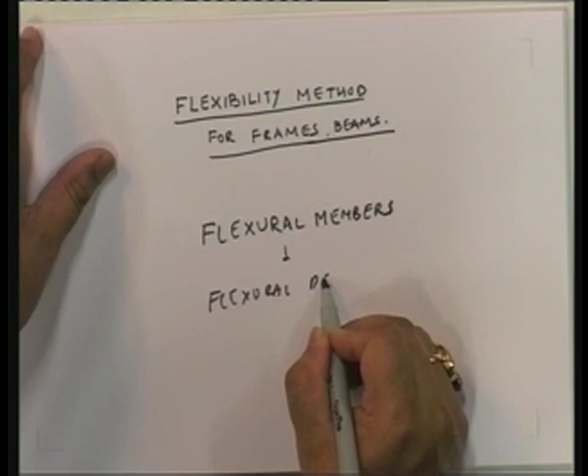Okay, so today we are going to be looking at the flexibility method for beams and frames. The essential difference between what we did for trusses last time and what we are doing for beams and frames is that these are flexural members as opposed to axial members—in other words, flexural deformations.

Now, just like we saw that in a truss you started off by looking at the truss structure and then the member forces in terms of the external loads, and from there moved on to solving the structural problem—now let us look at a member which has flexural deformations. What are the member end deformations?

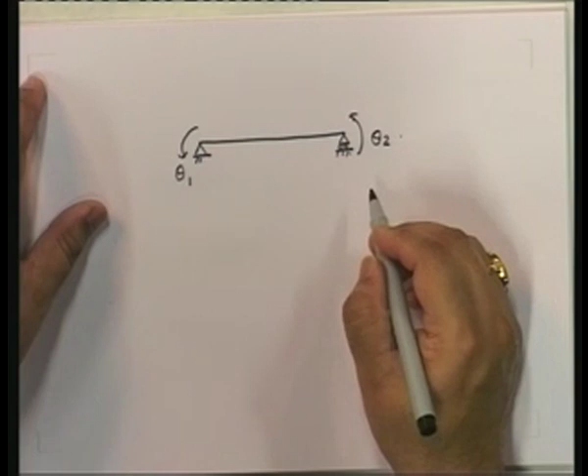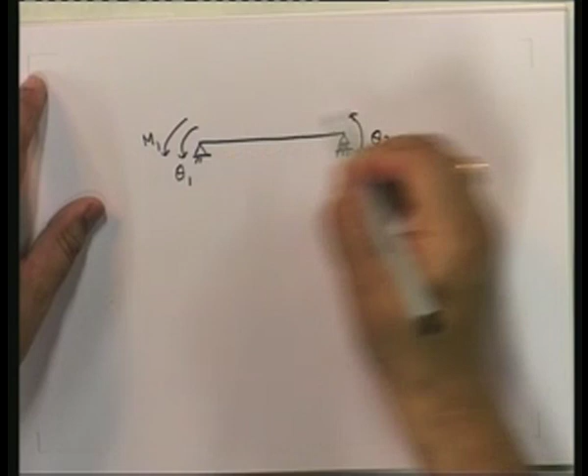We've already done this, I don't want to go into this. It is going to be theta 1 and theta 2. Corresponding to these thetas are essentially moments m1 and m2. Now, in addition to this, there may be thetas due to loads on the member. So if we write this down, we've already written this down—I am just explicitly writing it down.

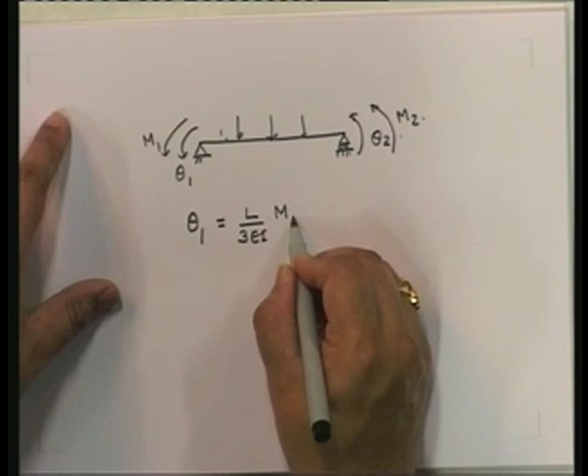Theta 1 is equal to L upon 3EI—I am going back to the old form and just rewriting it—plus theta 1 0. What is theta 1 0 due to? Understand that theta 1, the rotation here, would be related to m1, m2, as well as theta 1 0, which is the rotation at the left end due to the member loads.

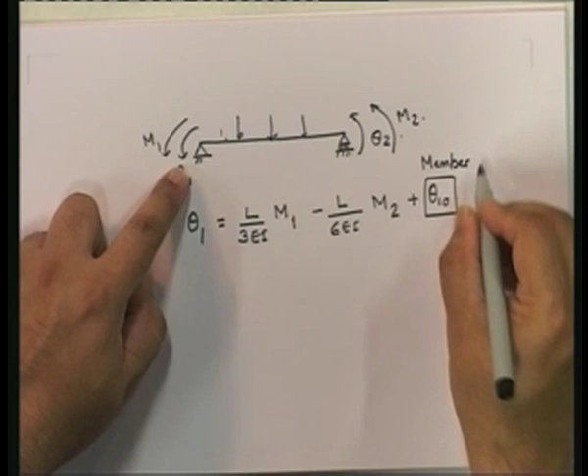So this aspect is due to member loads. Similarly, theta 2 is equal to minus... both of these are due to member loads. If there are no member loads, then these two are zero. So this we have already seen.

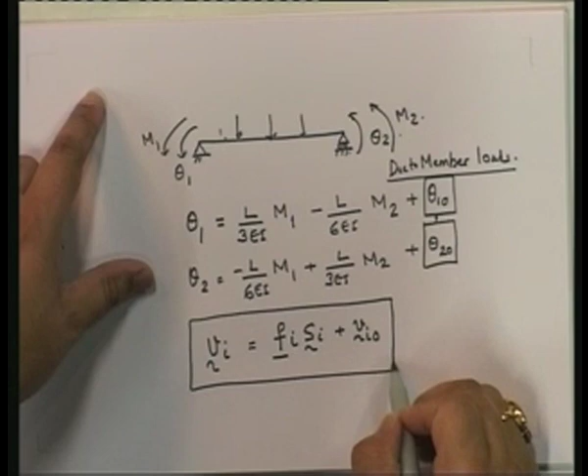So now I am going to rewrite it in this format. Now let us see what these terms are. If you look at them, Vi is equal to theta 1 and theta 2. In other words, the member deformations are the rotations at the two ends.

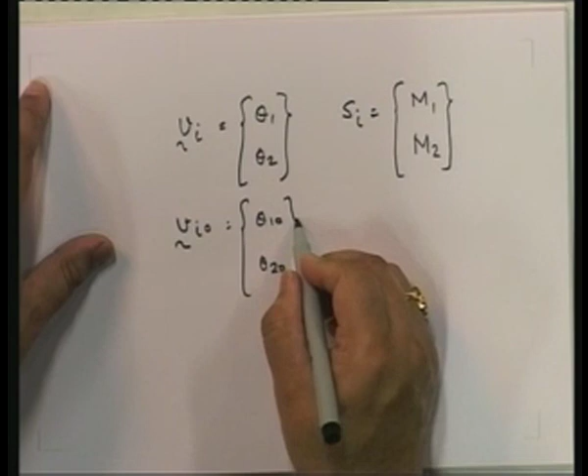This is the member deformations—I am using the same notation that we are going to be consistently using in this approach. Then what is Si? Si is equal to M1, M2. What is Vi0? It is theta 1,0 and theta 2,0.

Vi0 is due to, and I will call it in a broader sense, member effects, because we've already seen that rotations can happen not just because of member loads—they can also happen due to temperature, etc. We've already discussed that, so I won't go into the details. Finally, what is Fi? Fi, if you look at it, is L upon 3EI, minus L upon 6EI, minus L upon 6EI, L upon 3EI.

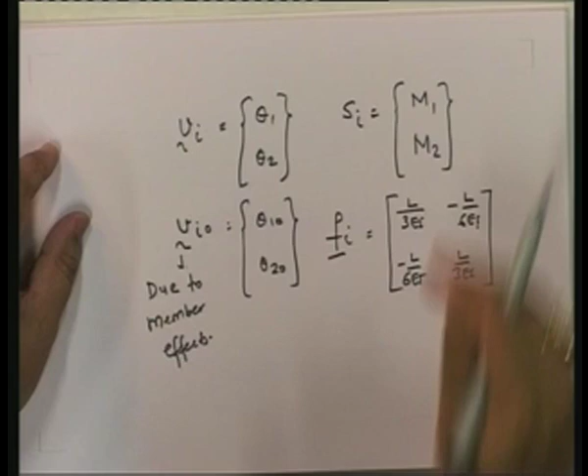So in other words, if these are defined in this fashion, then this is valid, because we know this is valid from earlier. So this is what we are going to be going with.

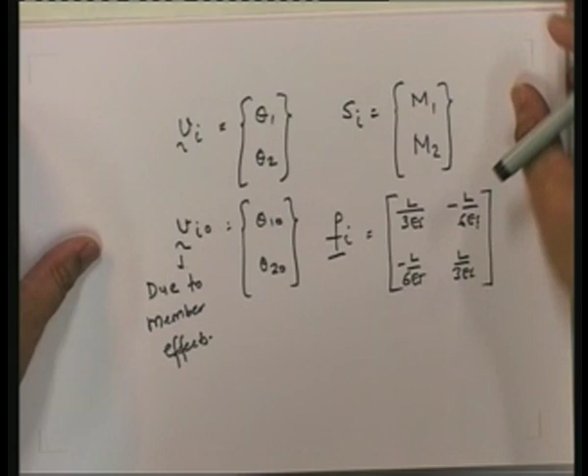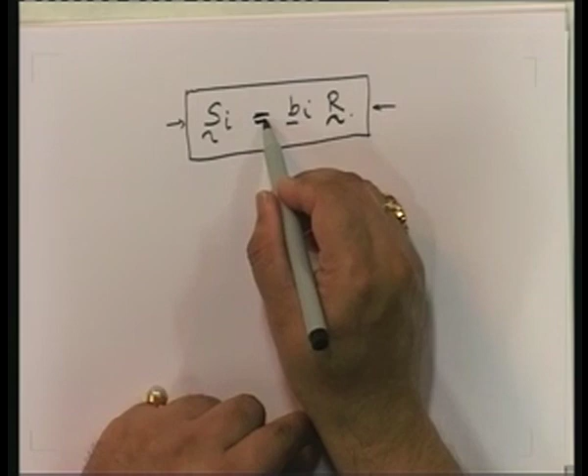This is one relationship. The other relationship is—what is this relationship? If you look at this again, all it says is how we get the member end moments corresponding to the loads applied at joints. Remember that loads applied on members are already considered in the effect we considered in Vi0—so this is just member end loads.

So if you really substitute it in here, we will see that ultimately we get displacements, in exactly the same way. I'm not going to go into the details, but once everything is set up, you will see that this is equal to the same terms, the way I wrote them.

This thing is valid because once you substitute the value of Si into Vi and all those things, you will see there is one term, and then there is one additional term, Bi transpose Vi0. This is a very important term.

These are member end rotations due to the loads applied on the members themselves, and by using virtual displacement, you will see that R can be related in this form.

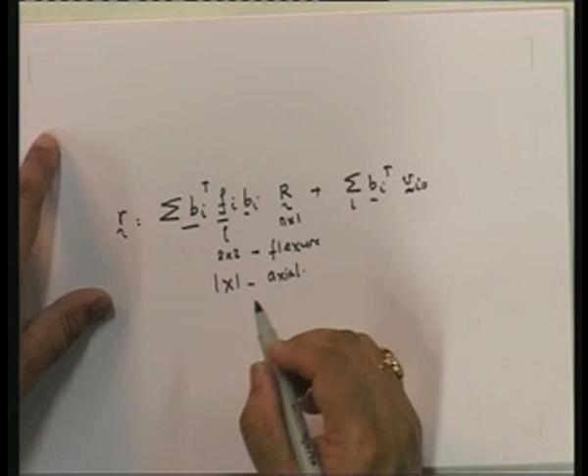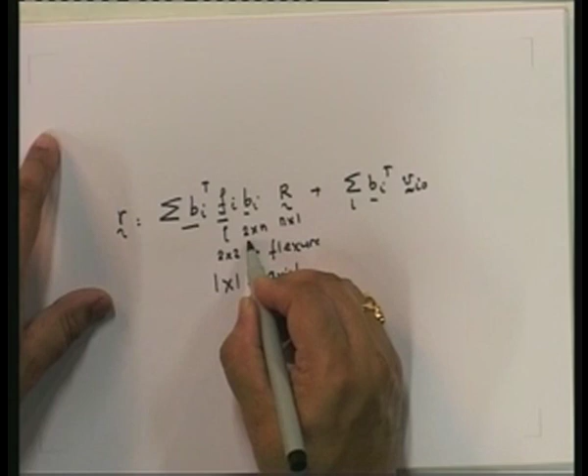This is for a flexural member, it's 2 by 2. For flexure, it's 1 by 1 for axial. If this is n by 1, then by definition this is going to be 2 by n or 1 by n, depending on whether it's a flexural member where you find the member end moments, or an axial member where you find the axial force. This correspondingly is going to be either n by 2 or n by 1, and this is going to equal a 2 by 1 or a 1 by 1.

Now I have this question. I did not introduce this in the truss, but I am introducing it here. What is this effect? For a flexural member, we know what this is - it's due to member effects, such as member loads, temperature, etc. In a truss, where would this come from? This would again come from member effects, which may be temperature, elongation or contraction due to temperature change, or lack of fit.

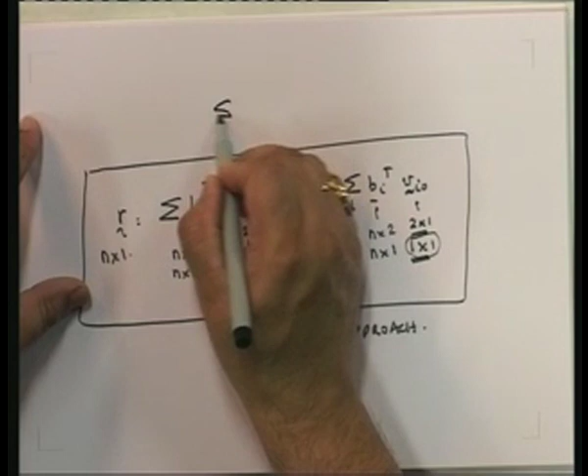Remember that, so this is member effect, and this one again is either n by 2 or n by 1, and ultimately this is n by 1. So this in essence defines the flexibility approach for structural analysis. How do we find out the member forces? Member forces in terms of the external loads are given by this.

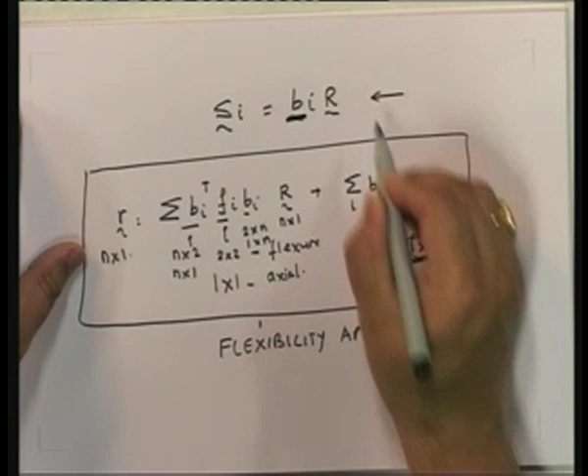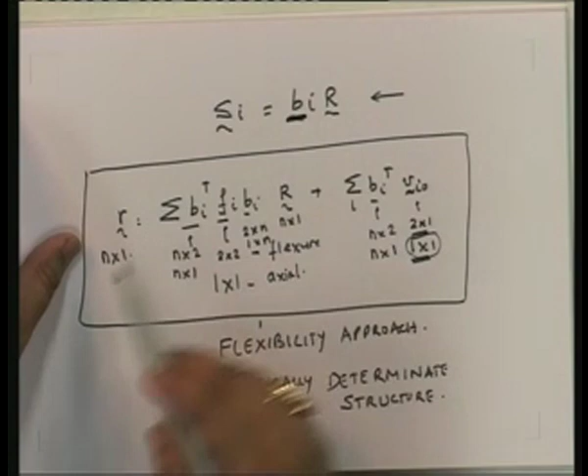So these are the member forces. Remember that all of this is for a statically determinate structure. So this in essence defines the member forces related to the structure loads, and these are the structure displacements corresponding to the loads. That in a sense is the definition of structural analysis: find the member forces and find the deflections. Now this again is for a statically determinate structure.

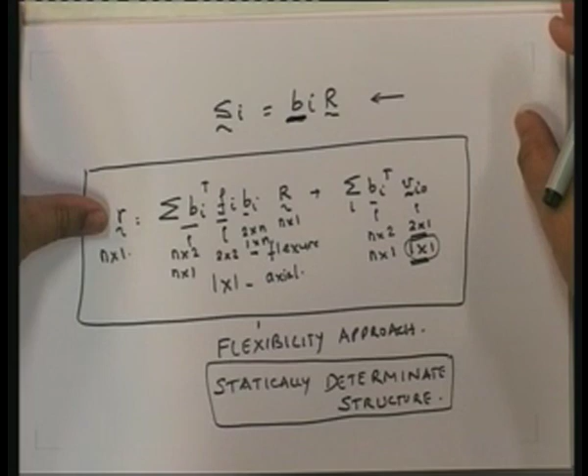Now let us see, once we have this, how we can apply it to a member. For a beam, it doesn't make much sense, so I'm going to take a frame problem instead and see how we deal with this. Of course, the frame has to be statically determinate.

Again, I am not going to go through the entire problem, I am just going to list out how to get what we want. So now let us look at it and put some loads on this structure. Let me put some numbers here - this is EI, this is EI, this is EI. Let us say that this is 5 meters.

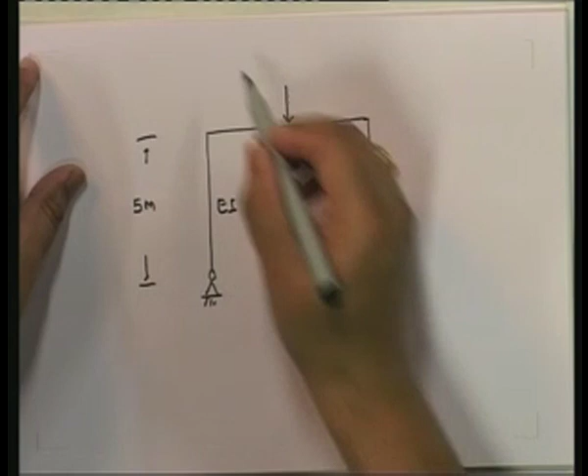This is 5 meters, so is this 5 meters - all of them are 5 meters. This load is let's say 40 kilonewton. And here, what we want to find out - there are lots of things to find out, but let me just tell you, I want to find the member end moments, because once I know the member end moments I can draw the bending moment diagram.

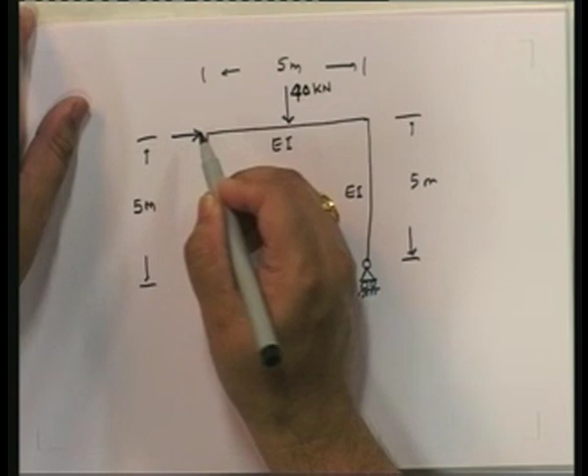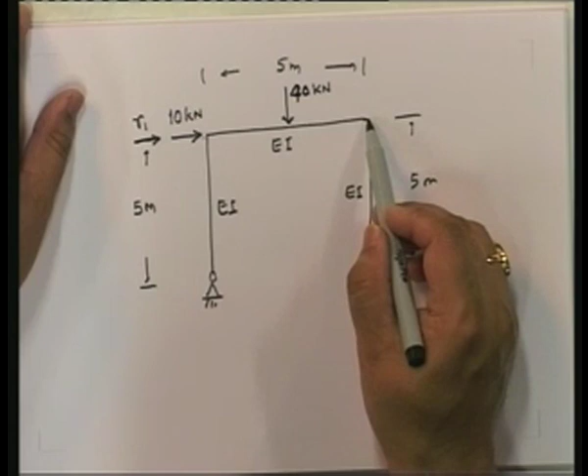So I want to find the member end moments, and in this particular case I want to find how much - well, let me put some other number here. Let me put 10 kilonewton here, and I want to find the displacement of this joint. In other words, the lateral displacement - note that since all members are rigid, the horizontal displacement of this will also give me the horizontal displacement of this. In addition, let me find out how much this goes by.

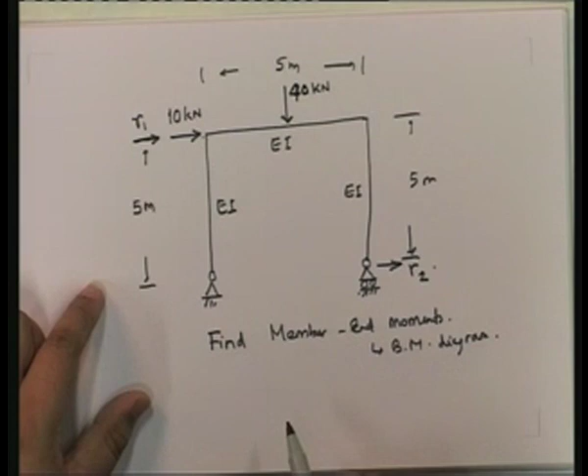Okay, so these are my two questions: how much does the top displace by, and how much does this displace? This is my overall statement. I also want to find member end moments. Once we find out member end moments, you can actually draw the bending moment diagram. And what else? R1 and R2, the values of R1 and R2. So this is my problem statement.

Now I have to understand how I am going to go about this. Look at this and you will see that this is essentially a statically determinate structure. So let us see how we are going to go about it. Now the first step in this problem, what do we find out?

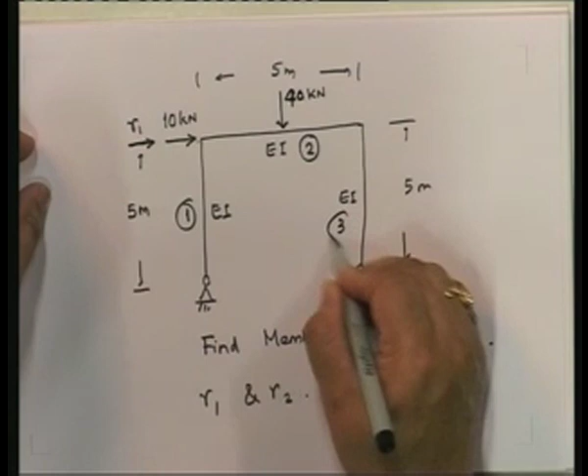For each member, we find out its member end displacement. Let me qualify this: I'll call this member 1, this member 2, and this member 3 - A, B, C, D. So AB is member 1, BC is member 2, and CD is member 3. So now the first step is for each one to write down the member force deformation relationship.

So for AB, okay, for AB, what is the this thing? There is no load, okay, and therefore V1, which are the two rotations at the two ends, are equal to - I'm going to write this in this format - L upon 6EI, and L in this particular case is 5, and note.

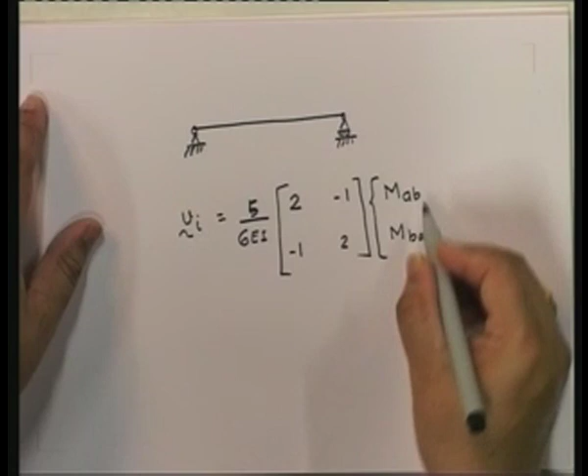See, 2L into upon 6EI is L upon 3EI, which is what you have, multiplied by the moments, which are MAB and MBA. Since there is no member load, so for AB, which is member 1, for V1, this is it.

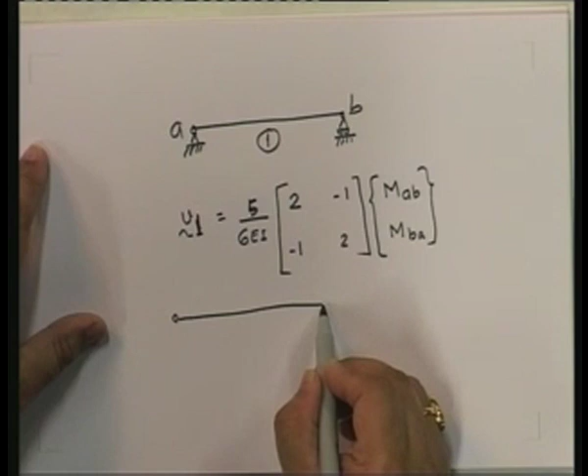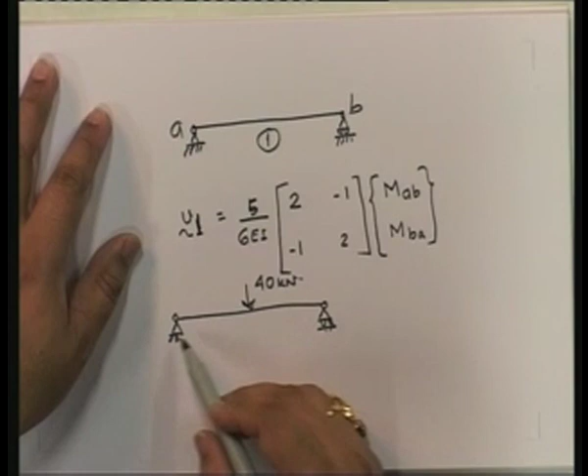Now, for member 2, this has a load of 40 kilonewton acting here. So the first thing that we have to do is understand that V2, the first part is this, but there is an additional Vi0, V20 that we have to write down. And that V20, how do we find out? Well, we find out under this, it's going to deflect like this, and we need to find out this and this. How do we find that out?

Under this, I think we have done it enough, so I'm just going to write it down how to find it out. This is going to be this is M, this is M1 and M2, this is M2, and once we go through the entire process, we see that theta 1,0 is going to be equal to, in this case,

50 into 5 by 4. By the way, minus, because these are opposite to each other. So 50 into 5 by 4 is this part. For that, it's going to be equal to 2 by 3. And then you'll have minus 50 into 5 by 4 into 1 by 3. And so essentially theta 10 is equal to minus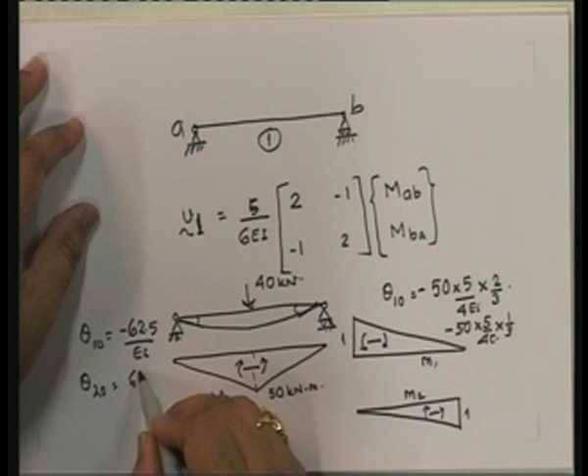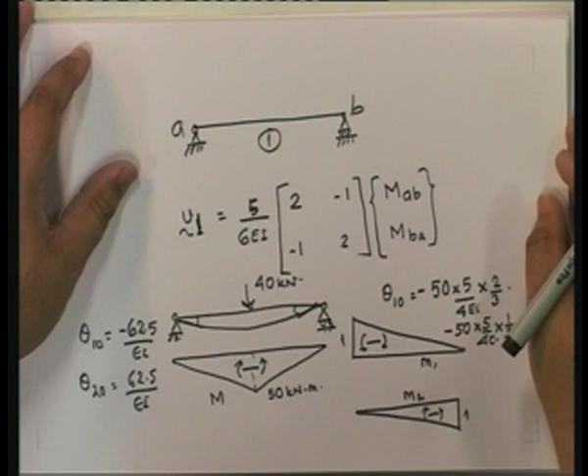62.5 by EI. Okay, and theta 20 is equal to 62.5 EI. Okay, that is actually, if you look at it, it'll work out to PL squared upon 16EI. Okay, but doesn't matter, we've computed this.

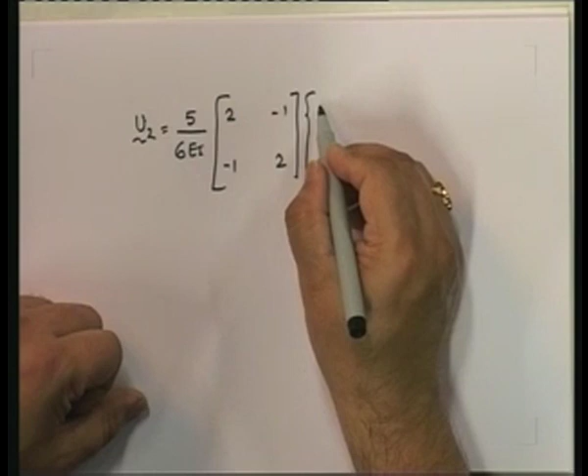Okay, so for V2 is going to be equal to 5 upon 6EI, 2 minus 1, minus 1, 2, MBC, MCB, plus 62.5 upon EI, minus 1 plus 1. And V3, since there is no load on it, is going to be equal to

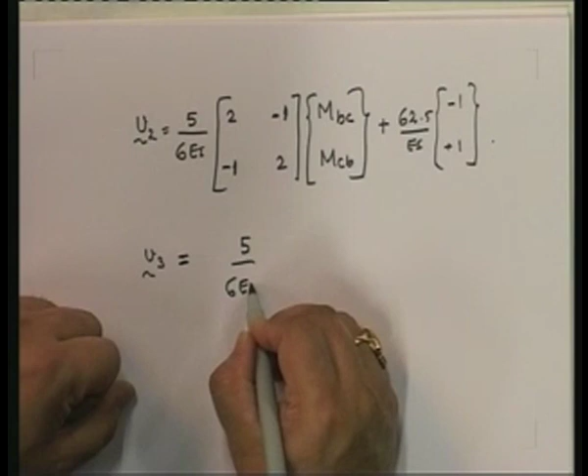V3 is going to be equal to 5 upon 6EI, 2 minus 1, 2, MCD, MDC. Okay, so these are, we have written down the force or deformation force relationship for each member. This part is the F into SI, and this part is the VI0. For V1 and for 1 and 3 there is no VI0. For 2 there is a VI0 which we have computed.

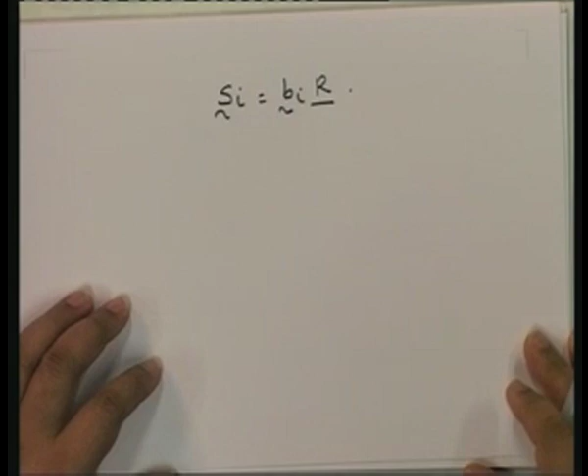Okay, so now the question comes, next what? Next is evaluating Si equal to Bi R. This is very, very important. Okay, so how do we find out this Si equal to Bi R?

What is R? In this particular case, R is, since we have - what are we finding out? We are finding out small r is equal to R1 and R2. Those are the displacement at the top and at the hinge. If you look at this, therefore capital R will be R1 and R2 corresponding to the forces. So if you look at this particular concept, that means in this particular case, what is R equal to? It is irrelevant what we are getting. R, you will see, will be equal to 10 and 0.

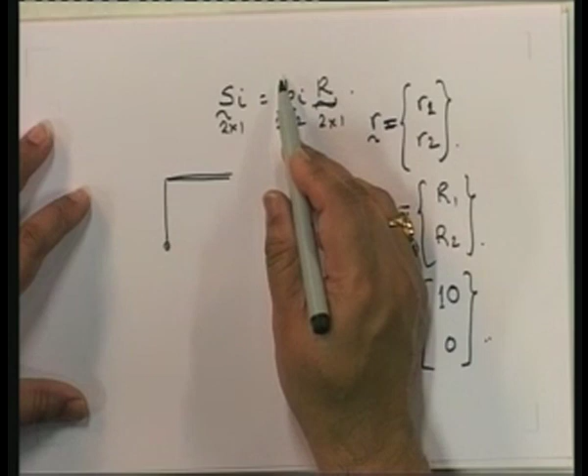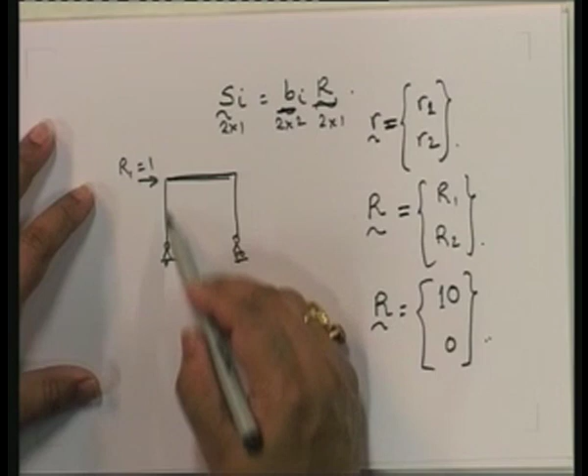In this particular case, so how do we find out Bi? What we do actually is this: we found out, so this is 2 by 1 and this is 2 by 1, this perforce has to be 2 by 2. Now this 2 by 2 has two columns. For each column, the way we find out the column vector is this: put R1 equal to 1 and find out the member end moments.

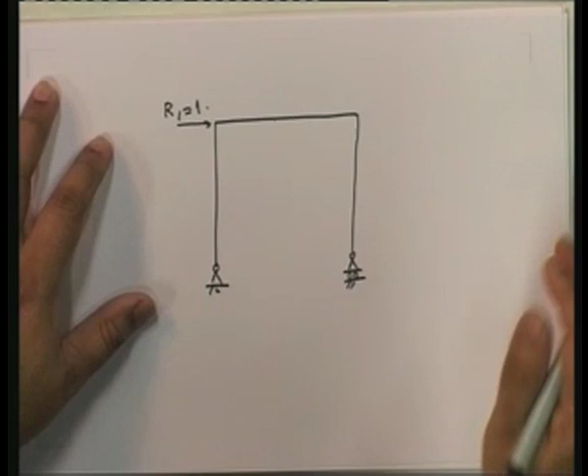Put R1 equal to 1 and find out the member end moments. If we look at that, this becomes... so this is 1. If you look at this, you will see that this gives rise to 1. So the reactions: sigma fx equal to 0, sigma m equal to 0, take moments about this point, and sigma fy equal to 0 gives me all of these. Once I have all of these, my member end moments become this.

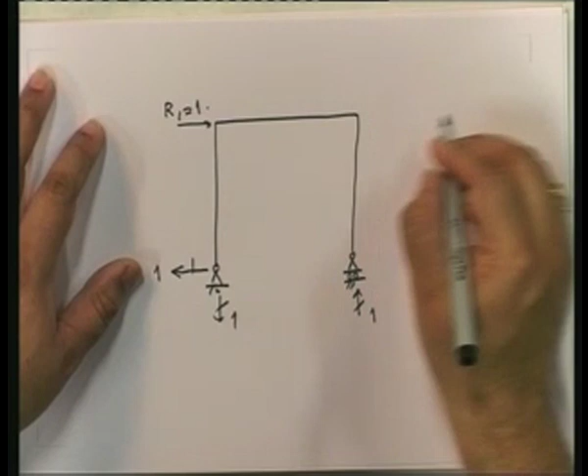So how do I find out the first column of B1? I am finding out the first column for B1. What would that be? Let's look at it. A. So I am finding out... if I look at this, I can draw the bending moment diagram.

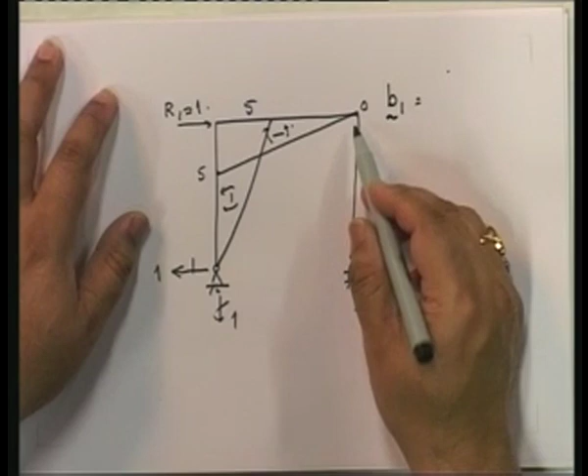How would the bending moment diagram look? It will look like this. This would be 5. Here, this would be going in this fashion. And over on BC, it's going to be like this, 5 and 0 here. And over here it has to be 0 because this one doesn't take any moment.

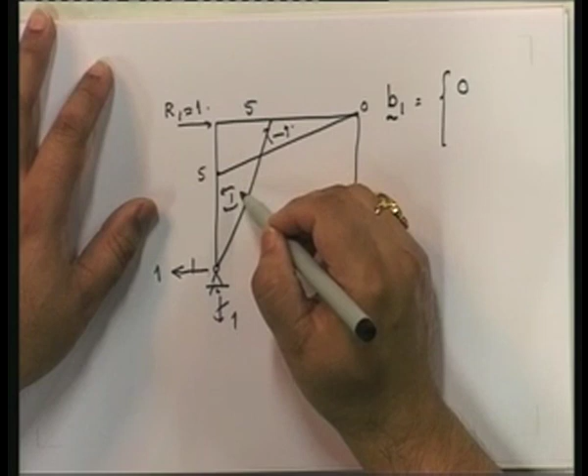So if we look at it, B1: at this MAB, what is the moment? 0. So this is 0. At this point, what is the moment? Anticlockwise 5. So anticlockwise 5 is plus 5.

Let's find out B2: 0. It's clockwise at this end, it's clockwise 5, so this is minus 5. Here it's 0, so it's going to be 0. What about B3? B3 you will see is equal to 0, 0 because there is no moment at this end. So this is the first part for R1 equal to 1.

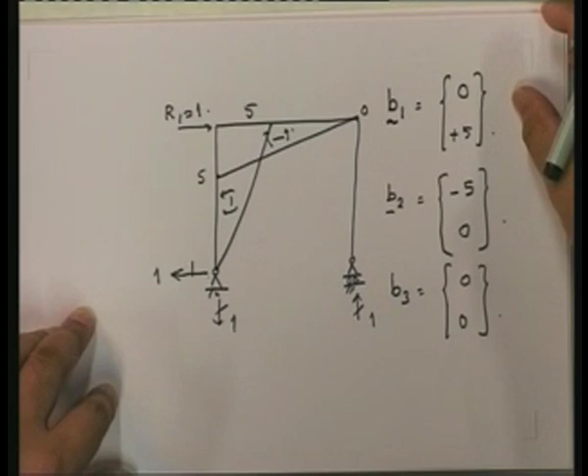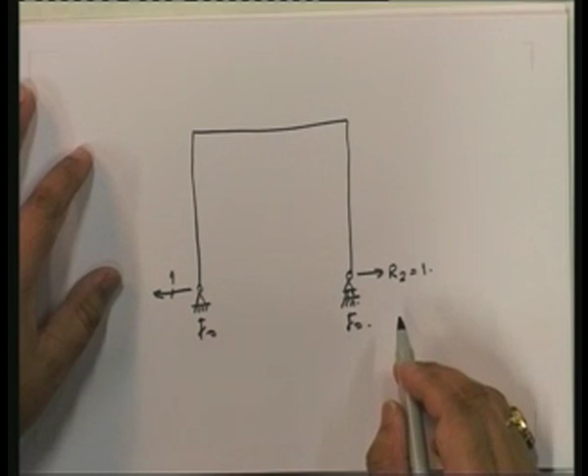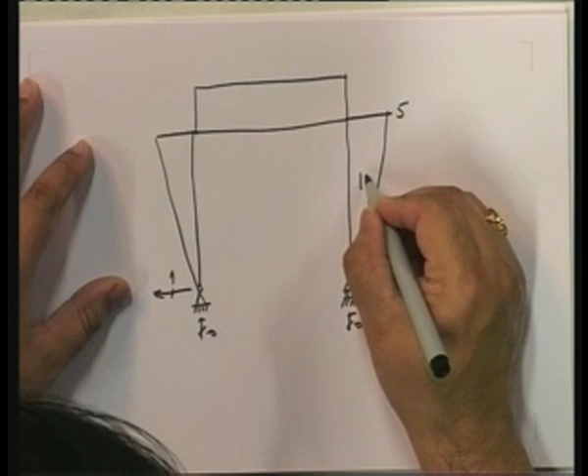Then we are going to put R2 equal to 1. If you look at this, this will give rise to this, and these two are going to be equal to 0. So how will the... 5, 5, 5. This is the bending moment diagram.

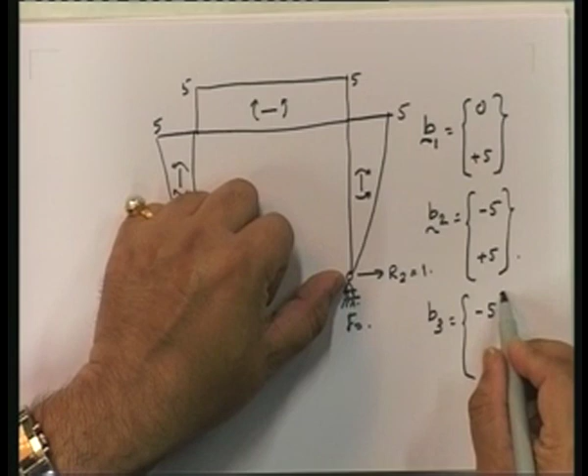Therefore if you look at B1 due to R2 equal to 1, this is going to be equal to 0, and this is again anti-clockwise, so it's going to be plus 5. B2 is going to be: this is clockwise, so it's minus 5. Here it is anti-clockwise, so it's plus 5. B3: here it is clockwise, so it's minus 5. Here it is 0.

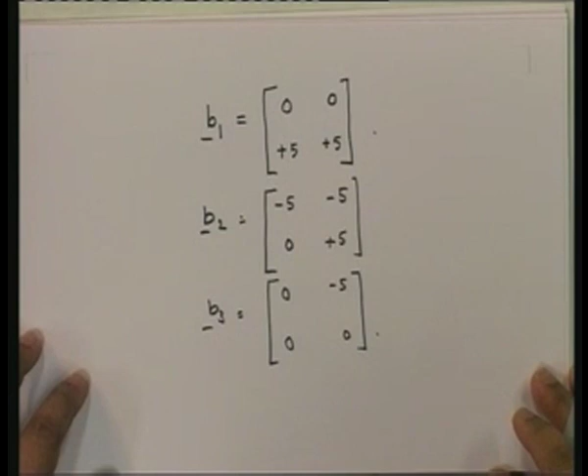So ultimately, having done these, if we write down B1, this is going to be equal to 0 plus 5 plus 5. This is coming from R1 equal to 1, and this next one is coming from R2 equal to 1. Similarly, R1 equal to 1, R2 equal to 1, each column, B3, R1 equal to 1 and R2 equal to 0.

Now here, what are the things for B1? This one, S1, is written in this way: MBC, MCB, and this is equal to MCD, MDC. This is S1, this is S2, and this is S3.

So now, if I have got these, I can plug in. What is my R? I know I have already given my R. R is equal to plus 10, 0. So I can find out my S1 very easily. That's the first step: find out the member end moments. And if you look at the member end moments, you will see that they are equal to...

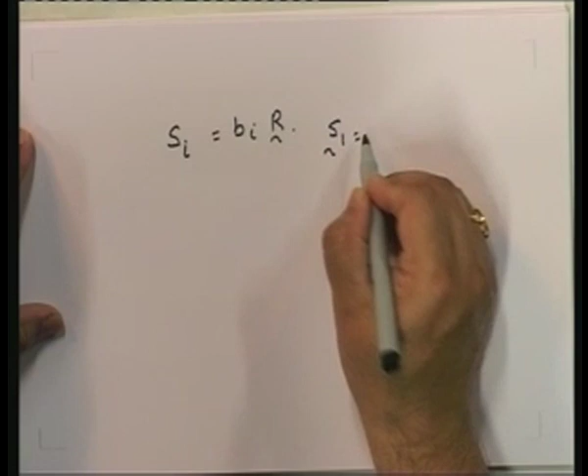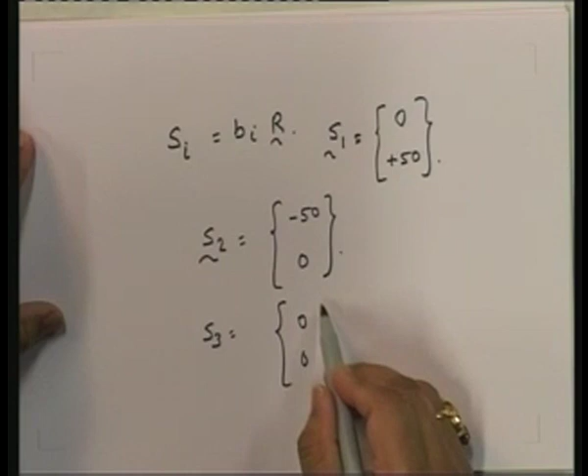If you put in, you will get S1 equal to 0 plus 50, S2 is equal to minus 50 and 0, S3 is equal to 0, 0. Satisfy yourself that this is indeed the case for this particular problem.

Now, we will come to problems later where we will see that this is not a complete picture of my S1. In fact, S1 actually has some additional terms that we will look at later. Right now I am not too concerned with this. For this particular problem, you will see that this is indeed how my S1, S2 are.

Now, once I know my B1, B2, B3, and I have also got this, what is my R going to be equal to? I am going to just put it down. My R is going to be equal to, if I just put it down, you can actually do the matrix multiplication later.

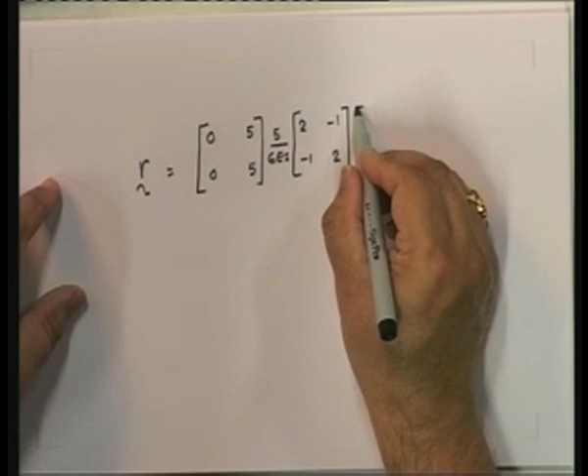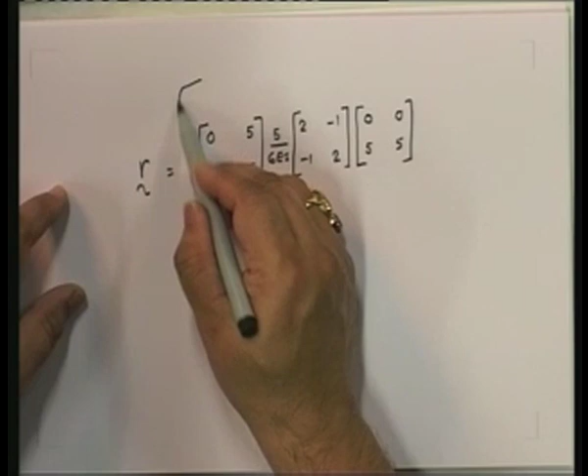This is B1 transpose, then into 5 upon 6 EI, 2 minus 1, 2, and then B1, which is 0, 5, 0, 5, plus minus 5, 0, minus 5 plus 5, 5 upon 6 EI, 2 minus 1, 2, minus 5, 0, minus 5 plus 5, plus 0, 0, minus 5, 0, 5 upon 6 EI, 2 minus 1, 2, sorry, this would be 0, 0, minus 5, 0, 0 minus 5, 0.

If you do all these computations, you will get your displacements R1 and R2. So you've got your S1 and S2, you've got your R, and that in a sense is, what are these terms?

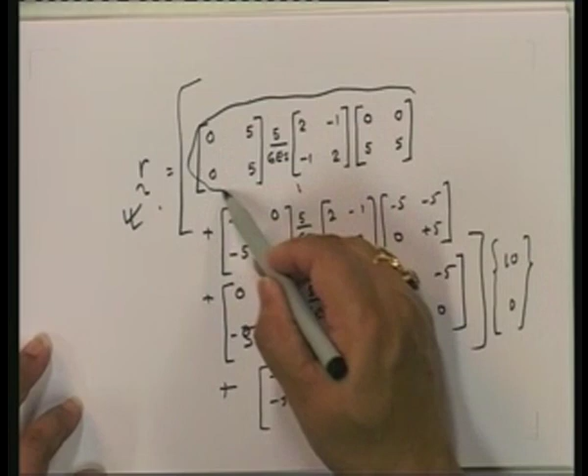This term is the contribution to the flexibility matrix of member 1. This is F2, this is F3. So if I add F1, F2, F3, that gives me the complete flexibility matrix multiplied by 10 into 0. So this gives me the structure flexibility matrix for this particular structure.

You will also notice something else, that in a structure flexibility matrix, remember the member flexibility matrix was 2 minus 1 minus 1 2 into L upon 6 EI. Did you notice something? It was symmetric. When you do these computations, you will see that the structure flexibility matrix is also symmetric. What does that mean? That Fij is equal to Fji.

Now, what is this flexibility? If you look at it, what is F11? You will get in this, you will get F11, F12, F21, F22. Each one you can evaluate. What do these mean? Let's look at this.

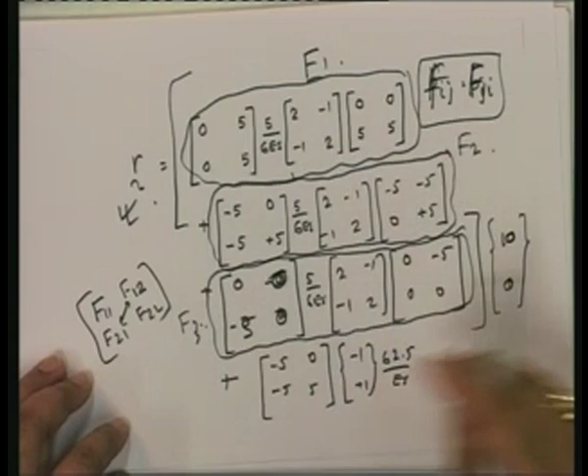A symmetric matrix is one in which the transpose is equal to itself. That is what a symmetric matrix is. This additional term essentially comes from the effect of the local load. So we've considered the load effect of the structural loads and the effects of the member loads. And obviously this is going to be a superposition of the two. This in a sense is structural analysis the way it is.

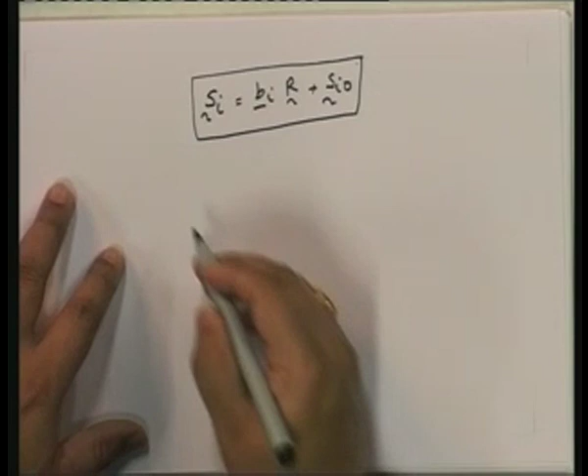Now remember I said that SI is equal to BIR in this particular case. When do we need to consider some additional terms? We will see that SI will not only be just BIR, there will also be an SI0. Where does this SI0 come from? So in other words, when you plug this in, you will see that ultimately R will have three terms.

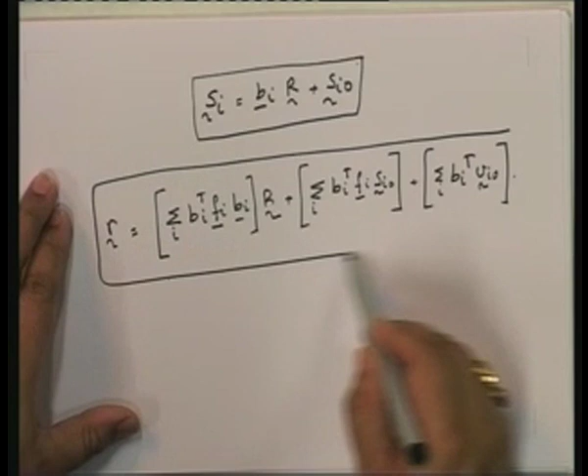One term will be summation over I, BI transpose FI BI into R, plus summation over I of BI transpose FI SI0, plus summation of I, BI transpose VI0. So in other words, this in a sense is the real thing. Where does this SI0 come from?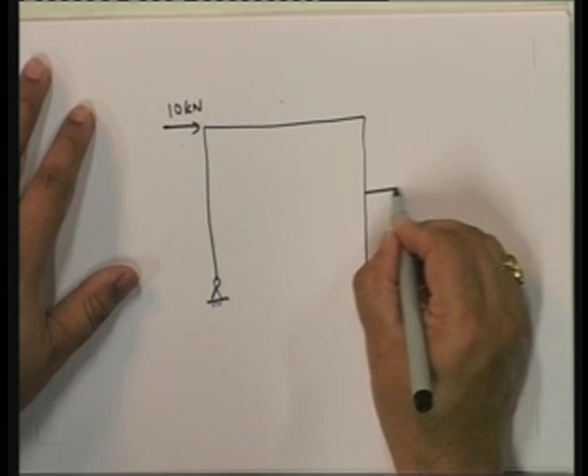Let me take a particular problem that I am going to look at. Now don't be worried that I am not solving all the problems. I am illustrating all the equations that I am talking about. Let us take the same problem that I have. Okay, and instead of applying the load here, I still have this 10, let it be. And I have a 40 kilonewton load acting at the center.

Now, note that there will be two aspects to the problem. One is this member load. See, this is, we are still finding out R1 and R2, and we are finding out the S, the member end moments. Now if you look at this particular case, there will be two aspects to this.

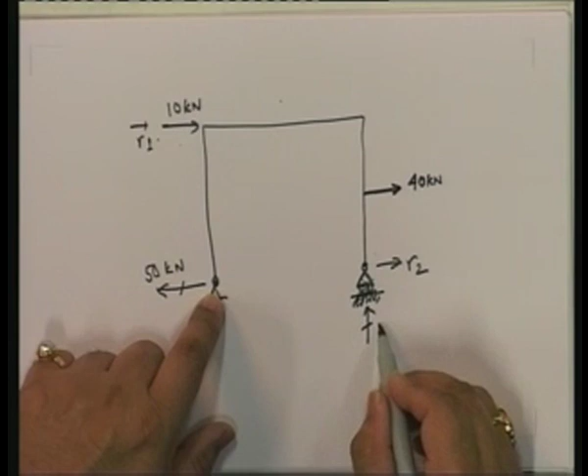Due to this load, you will have sigma fx gives you that this is equal to 50. Take moments about this point. You will see that this into 10 plus 5 into 40 is going to give you 200, 250, 250 divided by 5. So this lands up being equal to 50, and this one is going to be equal to 50. So if we find out the member end moments, let me draw the bending moment for this. How will the bending moment look?

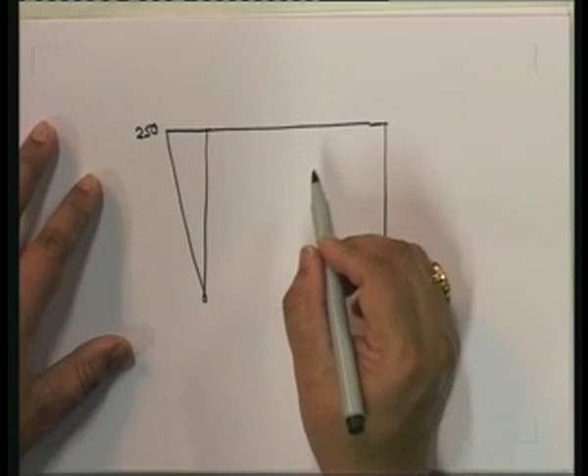250 here. And what kind of a moment is this? This is going to be a moment like this. Then here this is also 250, obviously from equilibrium considerations, and you have 50 over here.

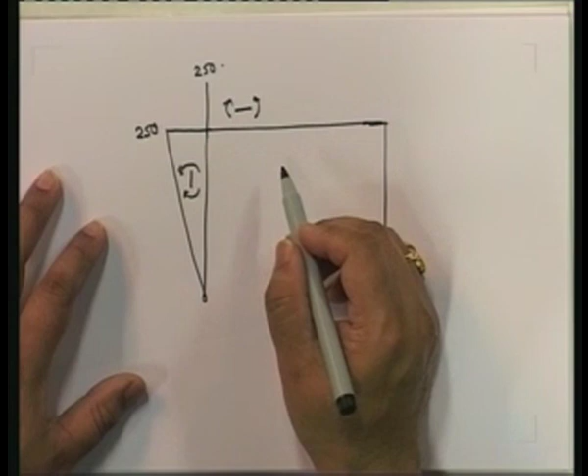So you're going to be having 50 into 5, 250, and this is going to be equal to, let's see, this is giving rise to, over here you have—and if you look at this particular point, what moment do you have? You will see that you will have 0 moment here. Now let's look at this. Here, what is the shear force? You will see that the shear force is going to be 40.

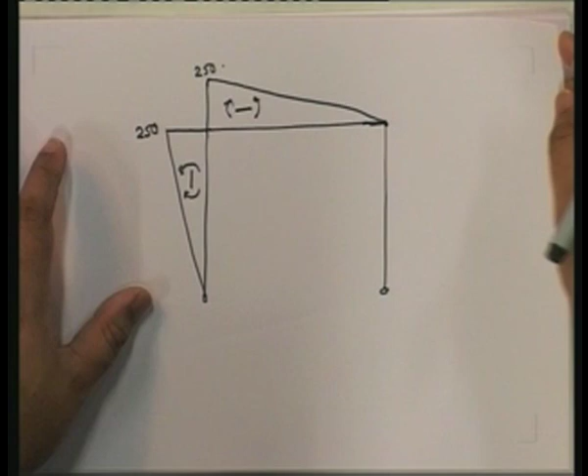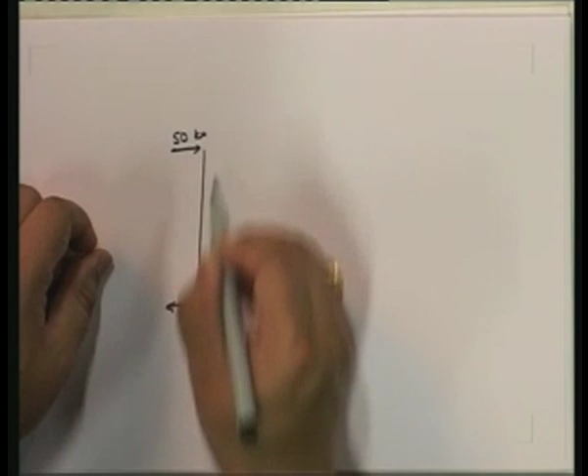Okay, so if you draw the bending moment, let me take you through this step by step. We've got the things. So this is going to be this, and on this side it's going to be in this direction. This is 50, this is 50, here this is 50, so on this side is going to be 50. And so the moment over here is going to be in this direction, and it's going to be equal to 250 kilonewton meter.

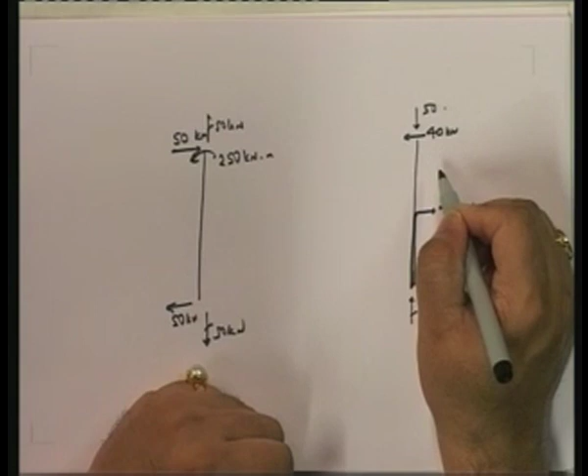Let's look at this. Here, this is 0, so from here to here there is no moment, and then from here, what do we have? We have 40 here, 40 here, and we are going to have 50 here. So what's going to be the moment at this point? You will see that since this goes this way, this will go this way, and it's going to be equal to—

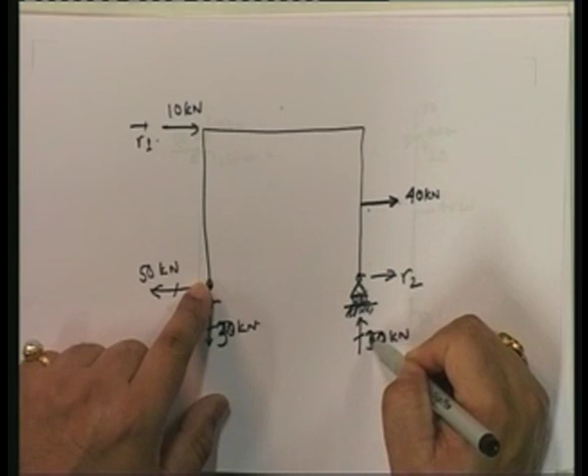The fundamental mistake—here we have, actually, this is where I made the mistake. This is 30, and this is 30. Because if you take moments about this, 40 into 2.5, so that is 100, 100 plus 50, 150 divided by 5 will give me 30. So this is going to be 30, 30, 30, 30.

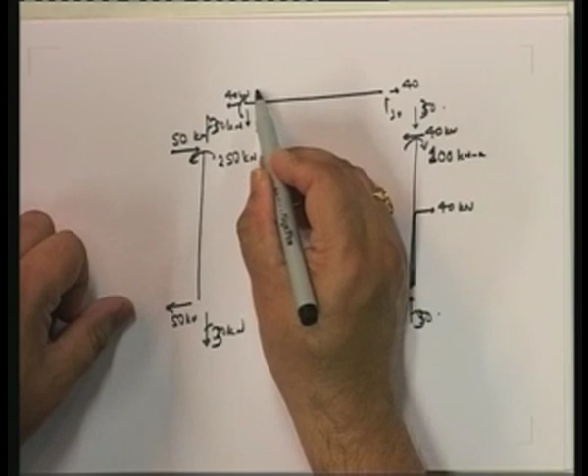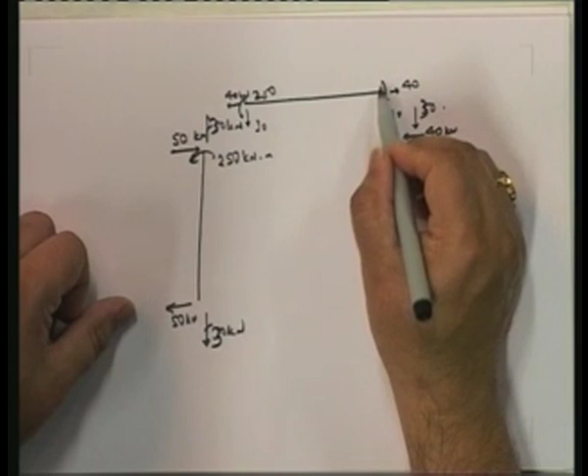So over here, what do I have? I have 40 into 2.5, so that is 100 kilonewton meter. And let's look at this one. This one is going to have 40 this way, 40 this way, 30 this way, 30 this way. Moment over here is going to be 250 over here, and so if you take moments about this point, this is going to be 30, so this is going to be 100 over here. So if you look at the bending moment diagram, it will look like this.

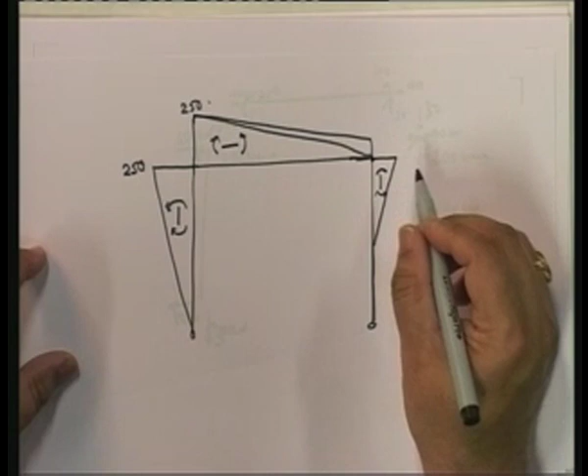That is going to be the bending moment.

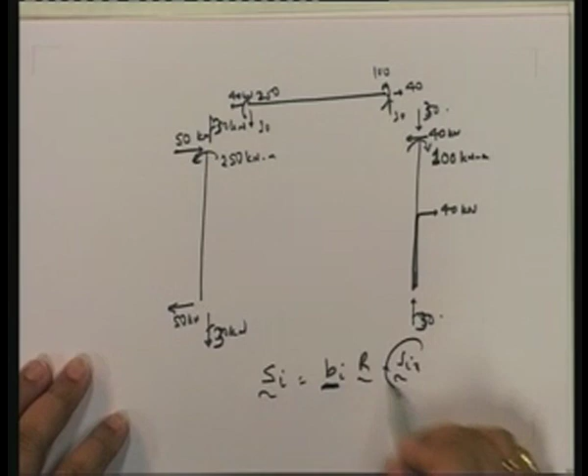Now the problem you will have here is, this is the bending moment diagram as we have it. I'm going to end my lecture here, but next time I'm going to show you how we get this exact same bending moment diagram using the concept of SI equals BI into R plus SI0, and we will see what SI0 actually stands for in general. So thank you for today.

We're going to continue looking at how to apply the flexibility approach for beams and frames. For beams, we are doing simply supported—a simply supported statically determinate beam is not an interesting problem, so that's why we're looking at a statically determinate frame. We'll continue with this particular lecture next time.